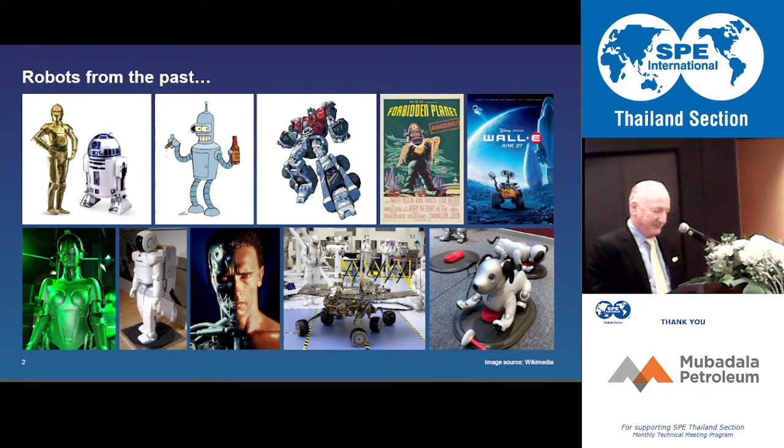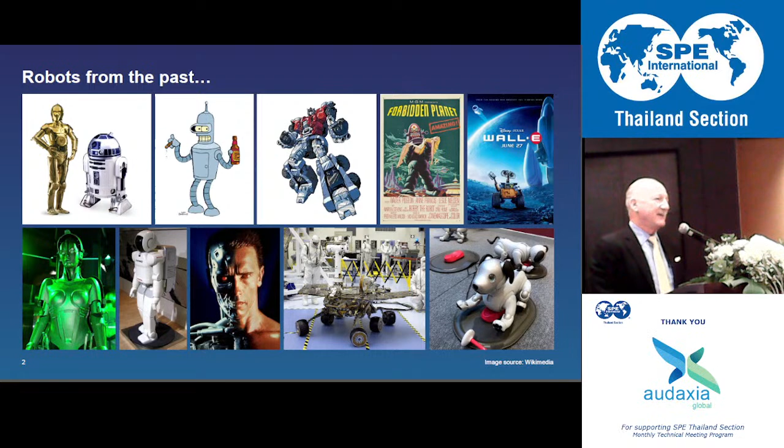So tonight's talk is on extreme robots, the benefits and the challenges. When we look at robots, what does it bring to our mind? Well, depending on when you were born, the word robot evokes a myriad of images. It could mean R2-D2 or a Dalek from Doctor Who, a cute robot from Star Wars, or a cyborg from the last horror film that you watched. But in today's offshore world, the robots that we use come in all different shapes and sizes.

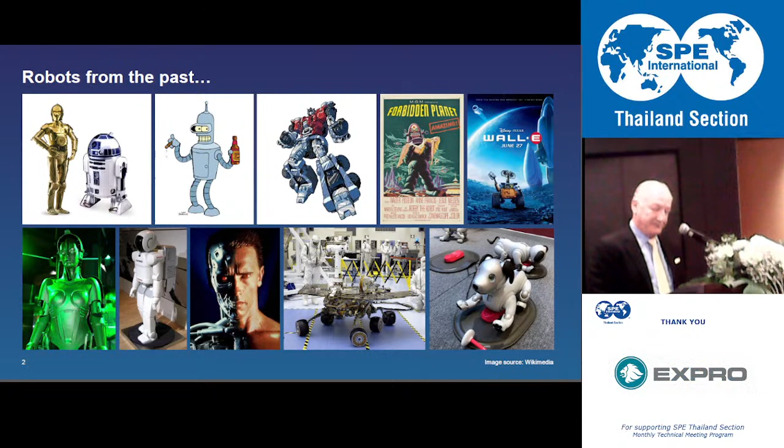What's driving the development of the use of offshore robots? Well, there's a whole lot of reasons, really. When I started to do this, it was before the invasion of Ukraine, so the price of oil was rather low, but it isn't anymore. However, when it was rather low, there was a need to reduce costs. And personnel are one of the largest costs that a company can have, because it's not just the salaries, it's the uniforms, the insurance, the leave, and everything else that's required.

Over the years, the people that have been in the industry for years are now retiring, and they're getting out of the industry. And a lot of young people don't want to join the industry, and they don't want to go offshore.

Renewables are coming on stream, and renewables are becoming very cheap. So the oil and gas industry has to reduce its costs in order to be able to compete with the renewables.

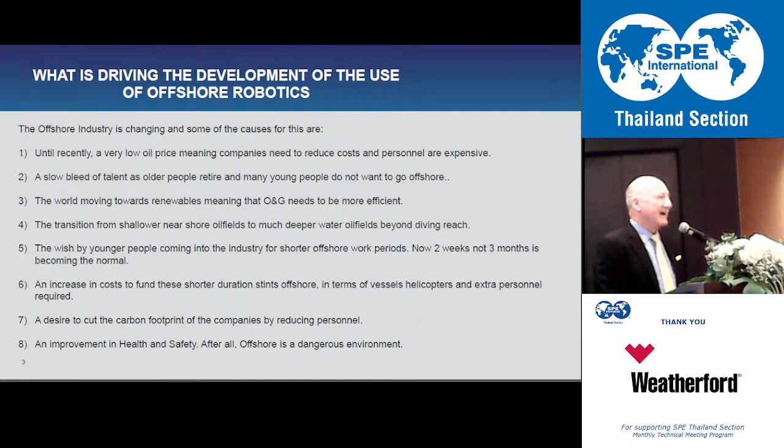In Thailand, Malaysia, Burma, Indonesia, and many other places in the world, the shallow water oil fields are drying up. They're coming to the end of their life, and people are moving to deeper water. So the use of divers is not possible anymore because the waters are far too deep. So robotics of one sort or another are needed to cope.

The young people that are coming into the offshore industry are no longer happy with going offshore for 3 to 6 months, as some of the older ones of us did. They'd like to go offshore for 2 weeks at a time. Well, that means you need more people. It needs more helicopters, more boats, more fuel. It's a much bigger cost.

We need to cut our carbon footprint. So in order to do that, we need to reduce those helicopters and vessels and the change-out costs. And then, of course, the offshore industry has always been a dangerous place to be. So for health and safety, the move towards robots is an obvious one.

Where do we use these robots? Well, really, we use them everywhere. They're in the air, they're on the platform main deck, on the drill floor, in the splash zone, and they're also used subsea. There's always somewhere where you can use it.

We're probably all familiar with drones. Some of us are lucky enough to have them as toys to take pictures with. But they're also known as unmanned aerial vehicles, or UAV. And they come in the 2 types you can see on the screen: minicopters and fixed-wing drones. We might today be familiar with the words Predator and Reaper and the images that these bring to mind, especially when we look at the photos and videos of the invasion of Ukraine. In the offshore industry, drones have an important role to play.

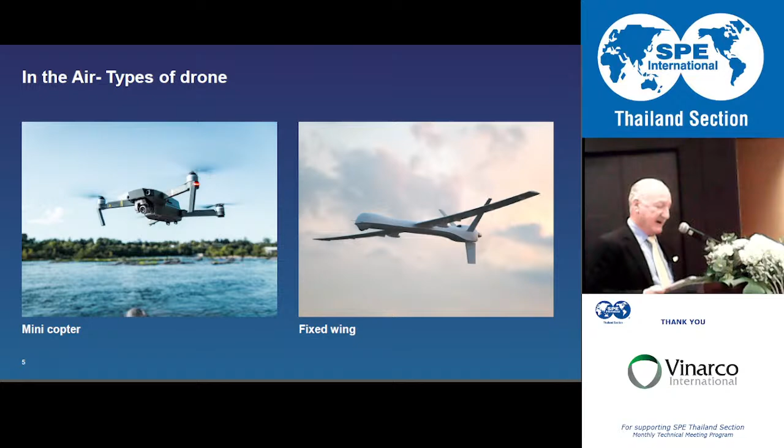Drones that can stay flying for hours and carry a multitude of different tools, cameras, and sensors are what are needed. And the tasks that these can perform are as diverse as pipeline surveys, gas and oil leak detection, flare stack inspection, corrosion inspection, and photogrammetry of structures.

We heard about 2 months ago at this SPE Thailand meeting about how detection of gas leaks can be measured from space.

With drones, we can use optical gas imaging, or OGI, to detect, visualize, and pinpoint gases such as methane, ethane, propane, butane, and benzene. And after we found these, you can perform TDLAS, or Tunable Diode Laser Absorption Spectroscopy, on it—TDLAS is a lot easier to say. This can be performed to identify and quantify the gas concentration. And this ability to monitor leaks, inspect for corrosion, and measure damage robotically is invaluable for saving time and money rather than performing these same tasks by traditional means.

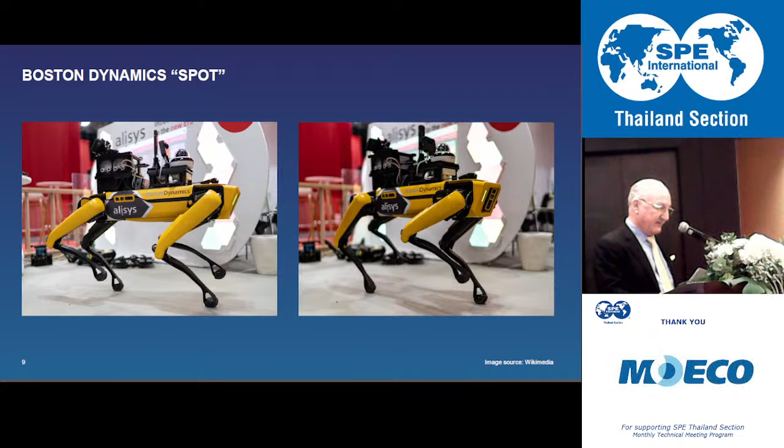Platform robots can perform the routine operations of measuring and monitoring corrosion, and sampling the air for leaks. Some can also perform even more useful tasks. Let's see what's available today.

One type of robot that you've probably seen on YouTube is called Spot, a robot dog developed by Boston Dynamics. It's now been refined so that it can recharge itself from its kennel, and it can carry instruments like lasers for measuring, cameras of different types such as low light, infrared, 3D, gas sensors, ultrasonic thickness measuring probes for corrosion mapping, thermal sensors, gauge reading abilities, and even a simple manipulator.

Spot can climb stairs and right itself if it falls over. It's become an asset to platform life. Having so many compatible tools that it can be equipped with makes it more useful, so much so that it can reduce the number of human personnel needed offshore. And that means a reduction in CO2 and less environmental damage.

This type of robot is especially practical on unmanned platforms, where the use of the robot greatly adds to the fixed camera systems that are already installed.

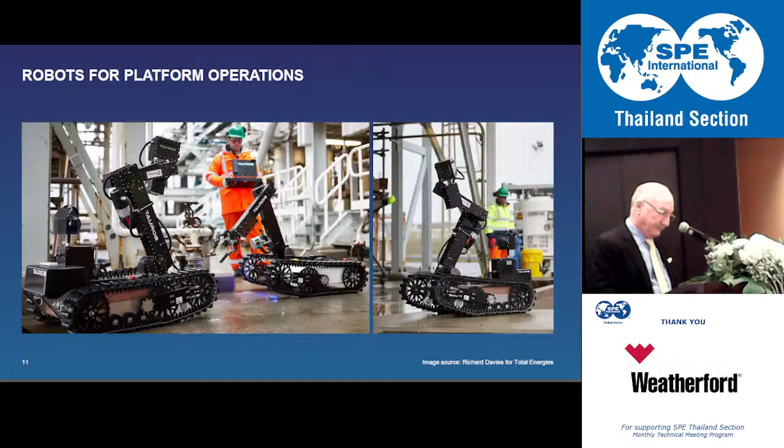Spot, though neat, is not built for strength. Tracked robots and wheeled robots are also being developed. These can carry much larger manipulators, meaning that valves can be opened or closed, and other such tasks can be performed. Another very useful application for these robots is the ability to enter places where the air is polluted.

This could come from an H2S release, or into rooms where fire suppression systems have been activated and the air is unbreathable.

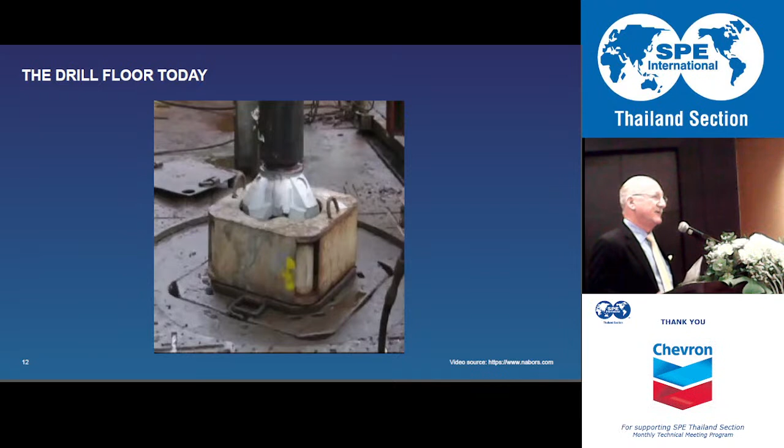For those of you that haven't been offshore, this next video shows the drill floor, of what happens today on an oil rig offshore.

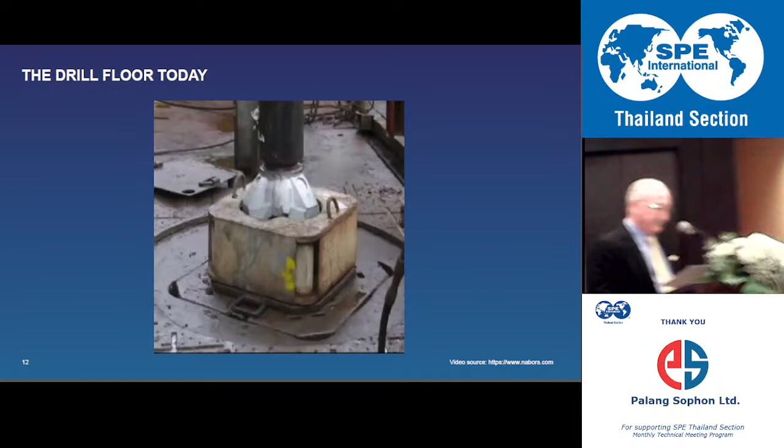So when we refer to extreme robotics, this is where we find extreme robots. It's on the drill floor. The drill floor is the most dangerous place on a platform.

It's where the drill pipe is screwed together in long lengths to be attached to the drill tube that's already in the oil well. This is where the drilling mud spills onto the deck of the drilling platform when we break the joints of drill pipe.

Because drilling is carried out to thousands of feet below the drill floor and the surface of the earth, when it's time to change the drill bit, the speed of joining or removing the drill pipe needs to be carried out as fast as possible.

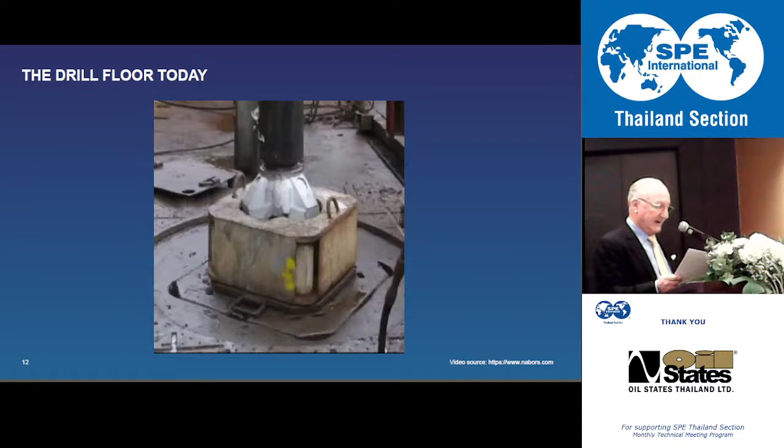Due to the mud making the deck slippery, the weight of the drill pipe, speed of the operation, and the size of the equipment being used, together with the always present danger of a blowout or gas discharge, the drill floor is where most accidents happen.

On top of these dangers lie natural hazards, such as the cold when drilling in the Arctic, or the heat when drilling in the tropics. Drilling takes place 24 hours a day in the dark as well as the sun, when personnel are just awake or feeling tired, which is when accidents happen.

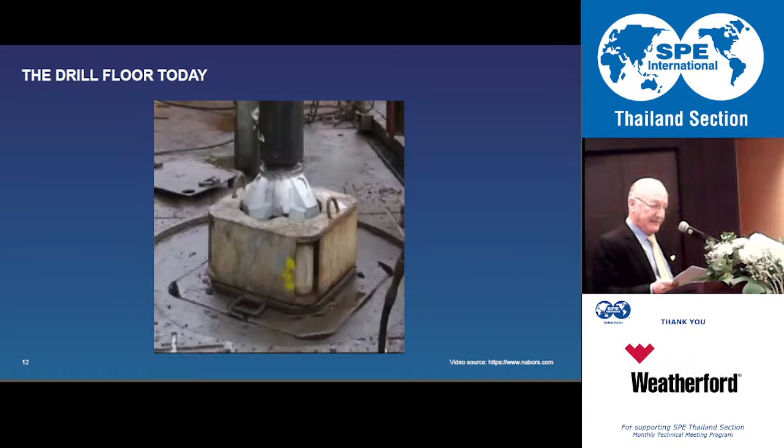If the drilling could be automated by using robots, this would be a great health and safety step forward. After accidents like the Deepwater Horizon in the Gulf of Mexico, the loss of life on the drill floor means drilling methods need to change.

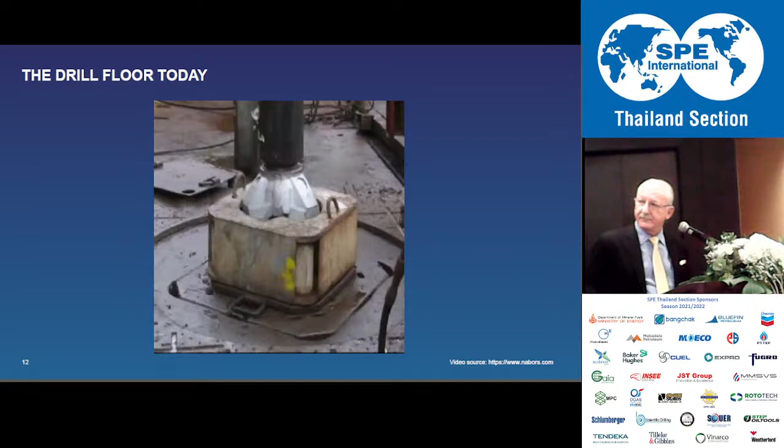The use of these new roughneck robots is expected to save 40 drilling days per year. This can equate to a saving of up to $12 million US.

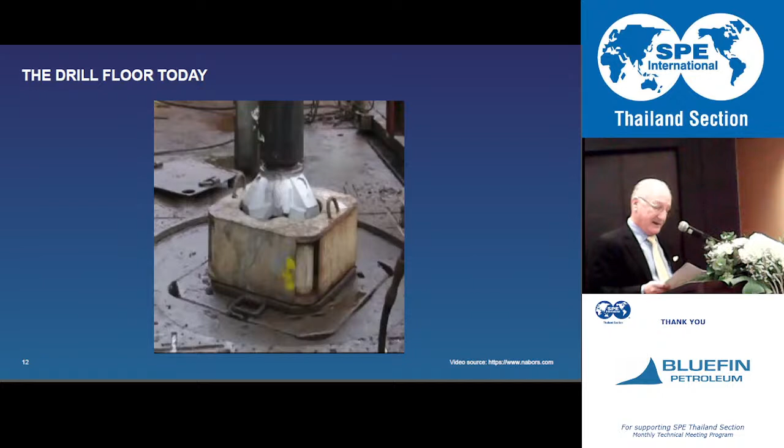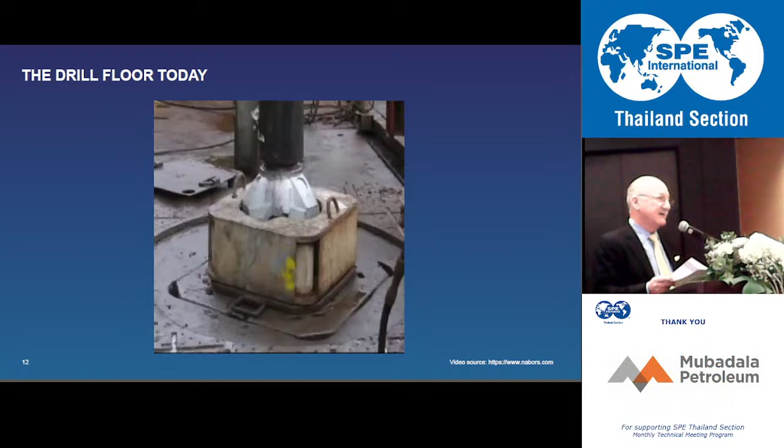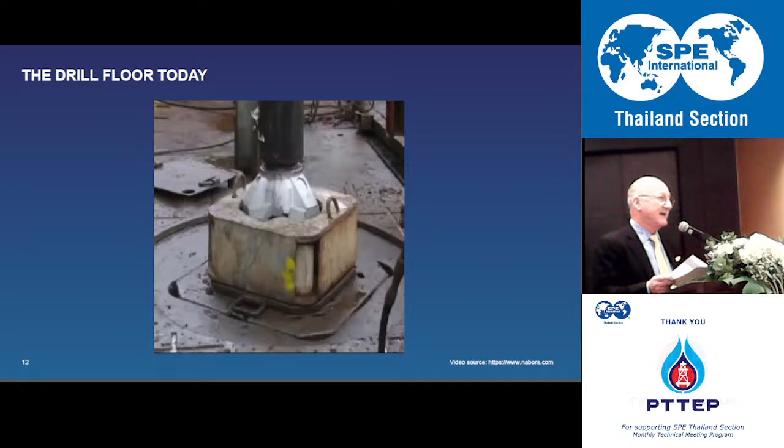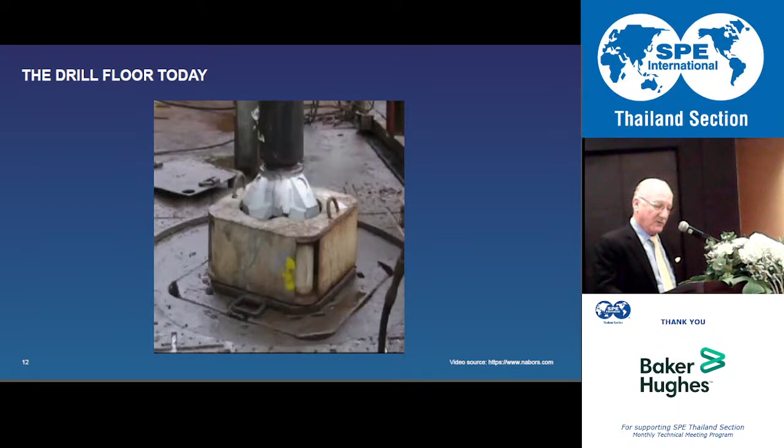Robotic operations mean that drilling crews can be reduced. This saves personnel costs, insurance costs, transport costs, and manning costs. And from a safety aspect, with a robotic drill floor, no personnel need to be in the red zone. Reduced costs in terms of time, a smaller CO2 footprint, and safety improvements are all benefits of adopting robotic solutions.

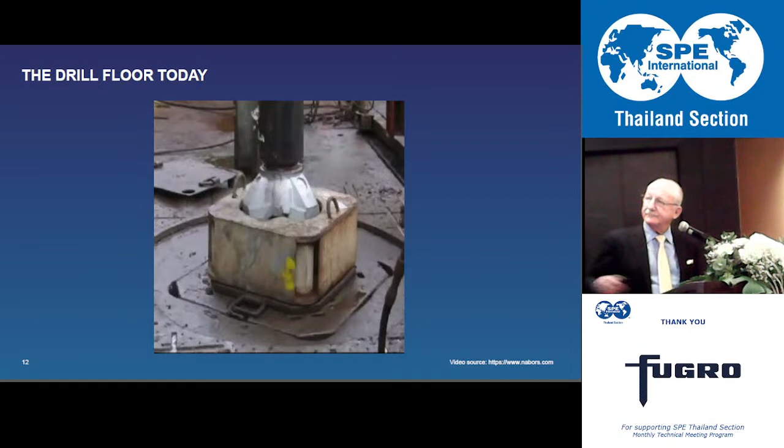This is the reality today of a fully robotized drilling floor. You can see in here the two drillers are in their cabin there. That's isolated from the air on the drill floor, so if there was a blowout or a gas discharge, they're safe. There's absolutely nobody near where you're taking the drill string out, joining it, or torquing it up. It's a much, much safer environment.

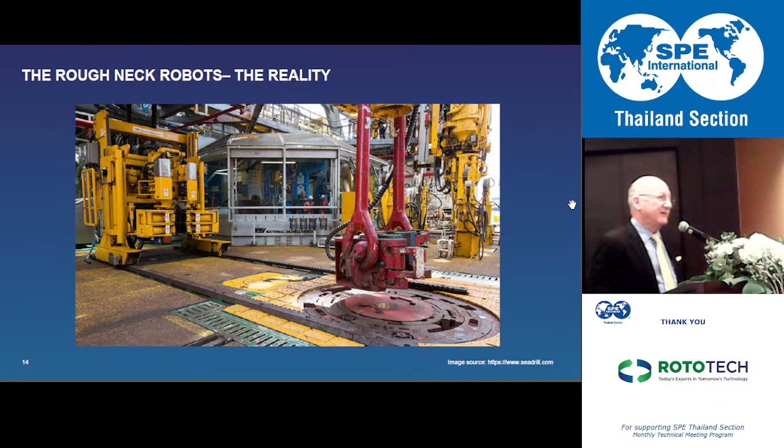Subsea robots. There are many different tasks to be performed subsea, and some have traditionally been carried out by divers. But now that the oil and gas industry is moving to deeper waters, divers basically can't go deeper than about 1,000 feet, although the record is about 2,002 feet. ROVs, or robots, are a much better way of doing things. When used subsea, these are referred to mostly as remotely operated vehicles, or ROVs. But today, they're now called autonomous underwater vehicles, or AUVs.

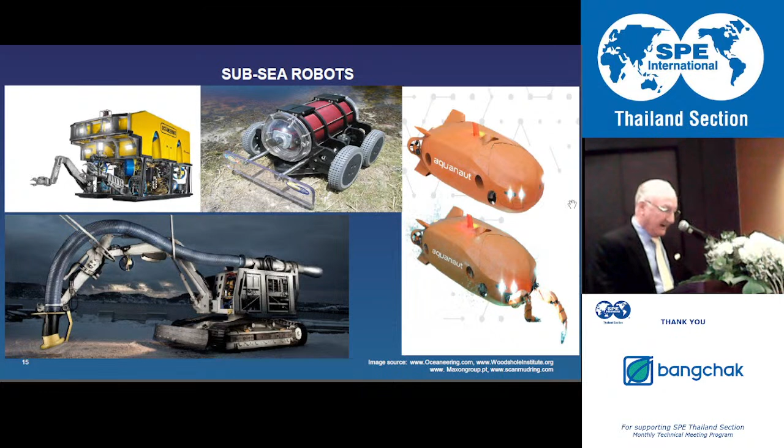A traditional ROV is operated via a wire, or tether, which connects the ROV to its control console and power supply. When used in deep water or in high currents, the tether causes drag on the vehicle. The longer the tether, the more drag this puts on the robot, which in turn reduces its range. In deeper water, to use short tethers, the ROV operates from a garage with a tether management system, where the tether is coiled up and released as needed. This makes the system more complicated, and simplicity is the key to good robotics.

To overcome this problem, and also to perform tasks such as pipeline surveys, a new type of robot was conceived called the AUV. We're probably most familiar with AUVs through the search for the lost aeroplane MH370, which was conducted mainly with the use of these robots. An AUV is pre-programmed with the task to be performed. It operates on batteries, which means the tether is not needed, and it does not need a surface vessel to run along behind it providing power and instructions.

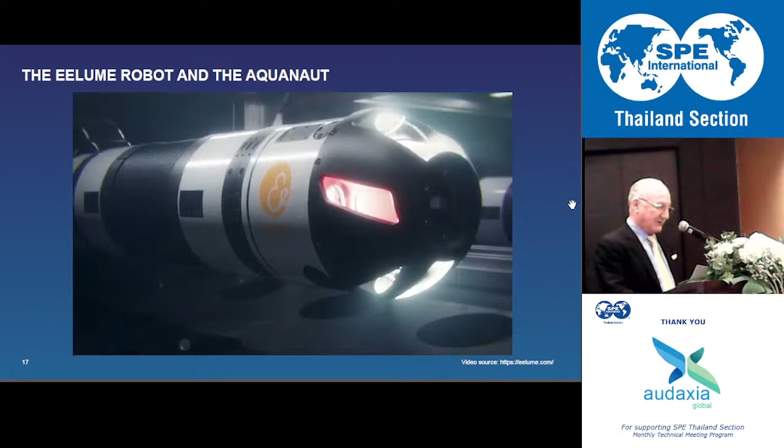The Eelume lives in an underwater garage, where it recharges and uploads the data it's acquired on its last mission. By working in this way, it minimizes the need for large support vessels, cutting fuel and personnel costs. It minimizes the time taken for launch and recovery to get to the job, and increases working time on the seafloor. They can inspect wellheads and pipelines, detect leaks, and open and close valves.

Another new development is the AUV that can turn into an ROV in a few minutes, and one such example is called the Aquanaut. This was developed by scientists and engineers who all worked for NASA. This gives it the ability to travel at speeds of up to 6 knots, meaning fast transit times and a high-speed survey ability. It has a long-endurance battery power pack and is equipped with very high-tech manipulators, making it dexterous for delicate tasks.

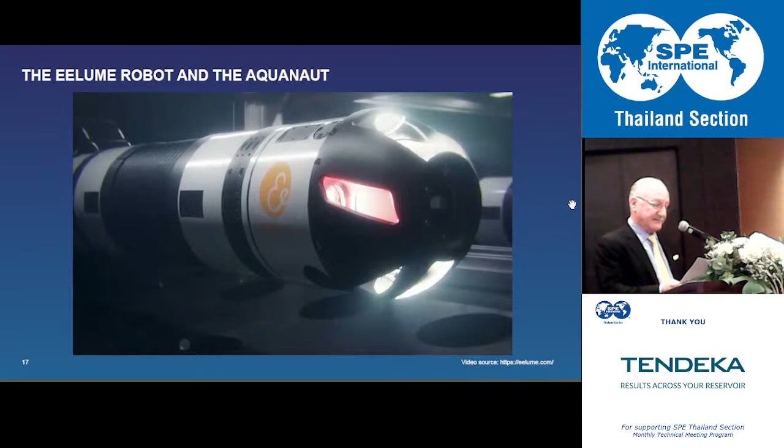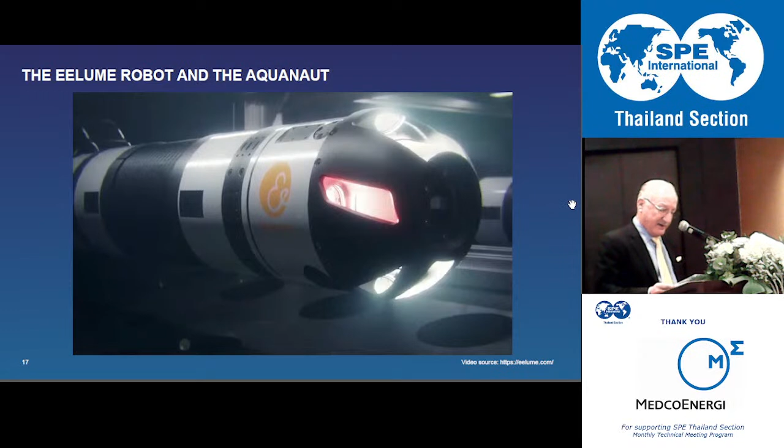Neither of these robots, sophisticated though they are, can carry out all the repairs that may be necessary subsea.

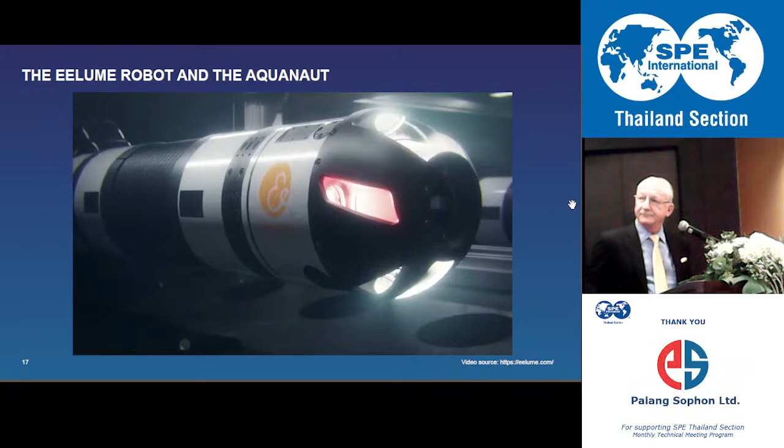The splash zone. This is the area on an offshore platform that needs the most inspection and repair work. This is because it's the area where salt water and oxygen mix on the steel of a structure, causing the most corrosion. It's also the area where flotsam and jetsam impact the structure, and occasionally vessels do as well. It's the area where the coating comes off the quickest, which obviously means the surface of the steel is exposed. Therefore, corrosion and rusting happen. It is the most challenging area to work in.

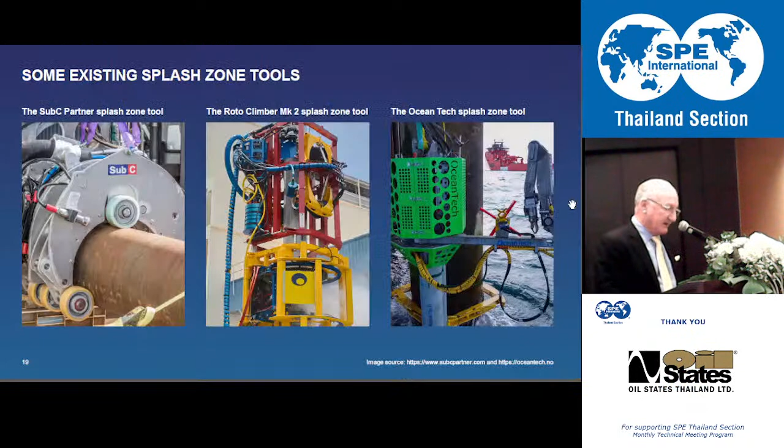Here is a look at some of the tools that are currently available for work in the splash zone.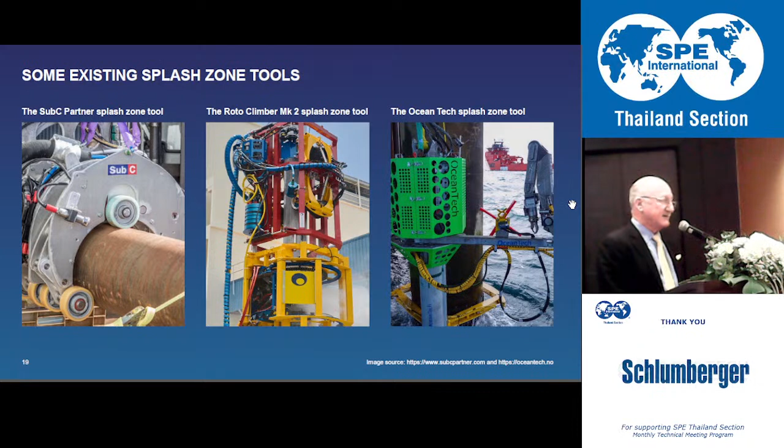Some of the problems with inspection and repair in this area are the size of the waves. Off Norway, waves of 25 meters have been recorded. We're on the 7th floor of this building - 25 meters equates to a building of 8 stories high. In Thailand, 2 meters is common.

The rise and fall of the tide is another problem. In some places, this is as much as 15 meters. Here, it's generally about 2. And then there is the current. In Thailand, in general, it's about half a knot. But in other parts of the world, it can be 4 to 5 knots.

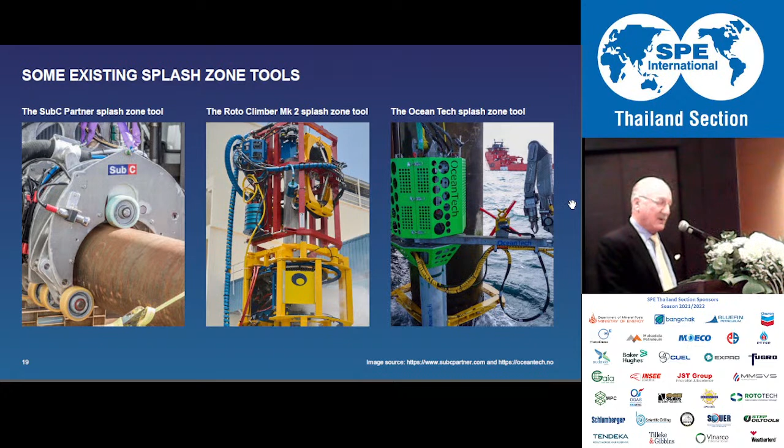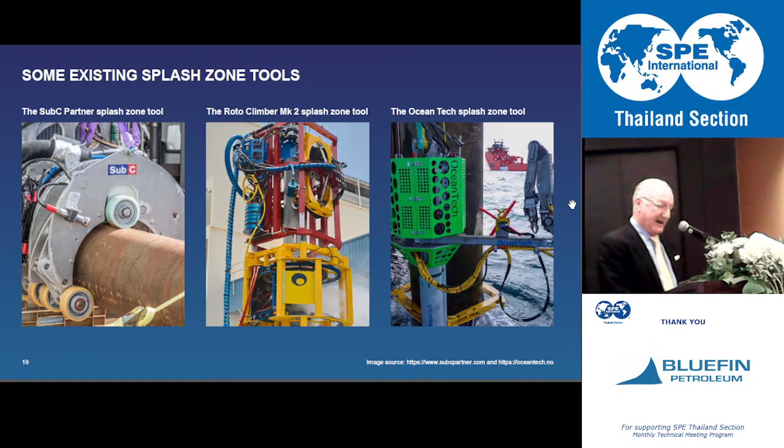All of this, when mixed with the locations of the boat landings, the conductors, and the risers on the structure, and the hazards of fishing line and rope entanglement, all these make work with divers or ROVs incredibly risky and dangerous. To perform actual work in this area is almost impossible, and yet this is where the work is most needed. In this video, you see examples of existing robot technology.

As well as everything we've just mentioned, there is the location of the area that needs repair and inspection, which is at sea level. This can be 30 meters below the main platform deck. To get here traditionally is by rope access. To be able to work here, the robot needs to be able to cling on to the structure or the pipe that needs inspecting. Here we can see the swells, and this is a calm day off Denmark.

It needs to be able to cling on hard enough not to be knocked off by a wave or washed off by the current. It would seem easy to surmount this problem for a robot that has arms wrapped around the pipe. However, the risers are attached to the structure by clamps.

And in order to be able to climb down the pipe, the robot needs to be able to move past this clamp. This involves a method to hold on with one arm and with the other arm reach around the clamp to hold on the other side before you let go with your first arm.

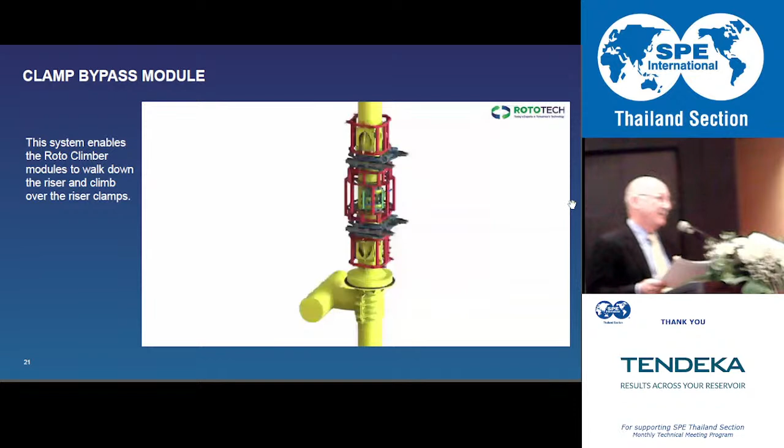This can all be done, but then there is a restriction on the weight of the robot that can hang on to a pipe to consider. And the area of operation that we're working in is called Zone 2, which means that the robot needs to be certified to work in an area where gas could be present that may be ignited.

And in addition to taking video and photos and corrosion readings, maybe laser scanning or weld crack detection is needed. If problems are found, then some form of repair needs to be carried out. And this is where current robotics come up short. There are almost no robots today that can repair risers, conductors, or members. The most common repairs undertaken at present are the installation of clamps.

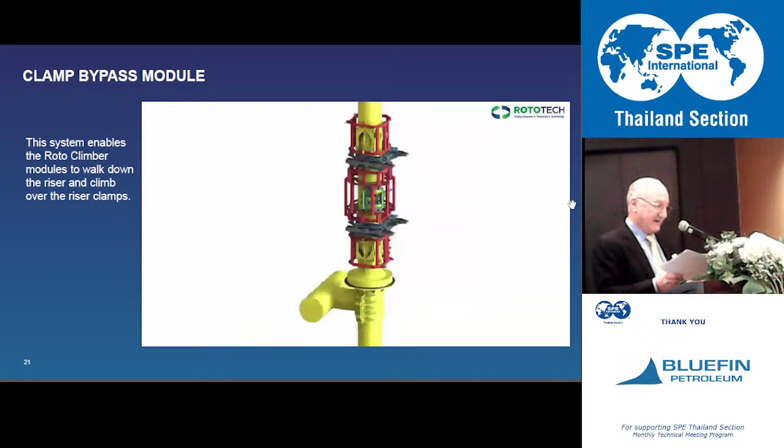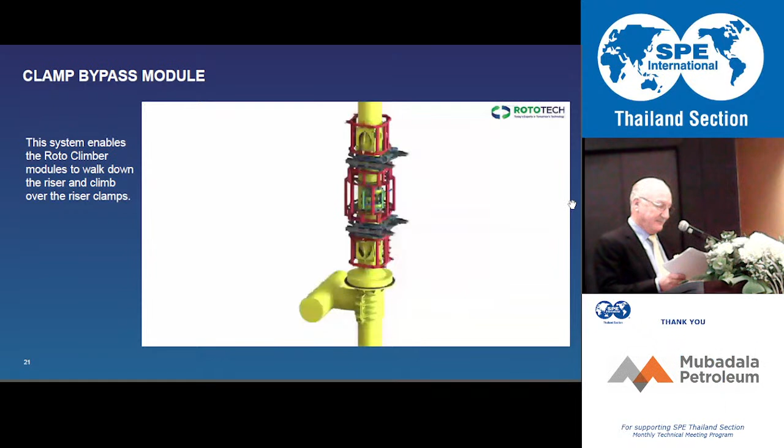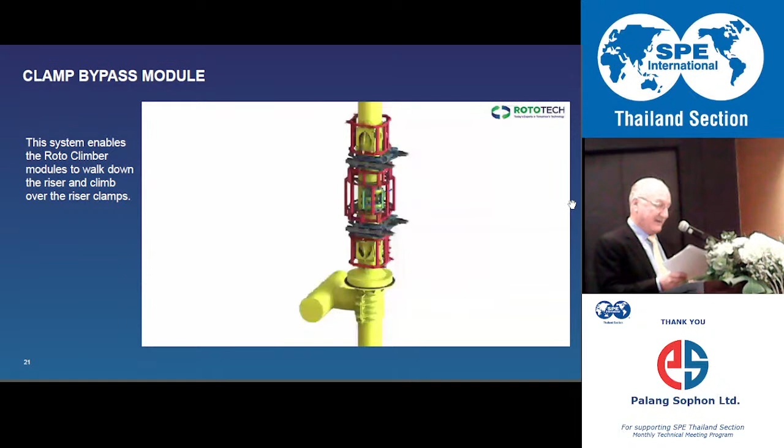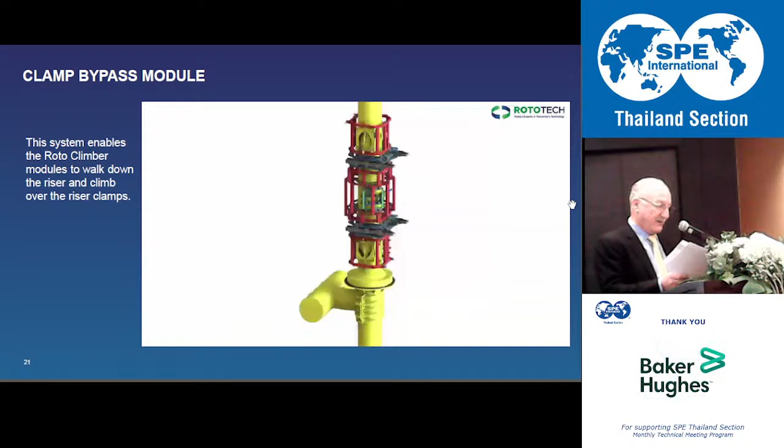This is normally performed on a horizontal pipeline. A rough costing for an ROV installed clamp on a pipeline would be in the range of $7 to $10 million, depending on the pipeline size, pressure, the length, and the depth below water of the repair that's needed. Today, it's not possible to put a clamp on a vertical pipe, such as a riser, robotically.

Another technique in common use is wrapping the area with a suitable tape that may protect from further corrosion, or it might be used to strengthen the pipe to reinstate it to its original working pressure. Before the tape can be applied, the area needs to be thoroughly cleaned so that the tape will adhere. Should there be holes in the pipe, then these need to be covered before the tape is applied. And finally, it may be necessary to apply many layers of tape for pressure containment.

12 wraps are not unusual. 12 wraps give 24 layers because each wrap is overlapped by 50%. If we take an example of a 36-inch pipe and we want to wrap 2 meters of pipe, the robot needs to be able to carry 1,750 meters of tape. That's a mile of tape to perform a 2-meter repair. This means that the robot needs to hold this much tape, be able to wrap it, and be able to join the tape rolls together.

This is the sort of extreme robotics that are needed offshore. Purely inspection-related abilities are no longer enough. As oil and gas facilities age, they need repair. This is driving the demand for ever better and more sophisticated robots.

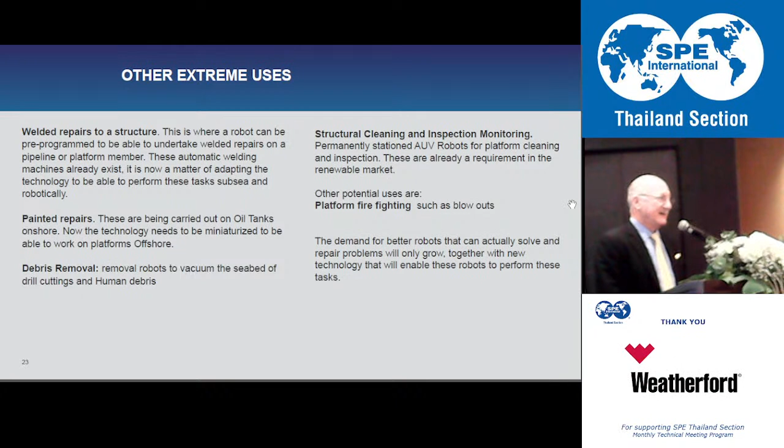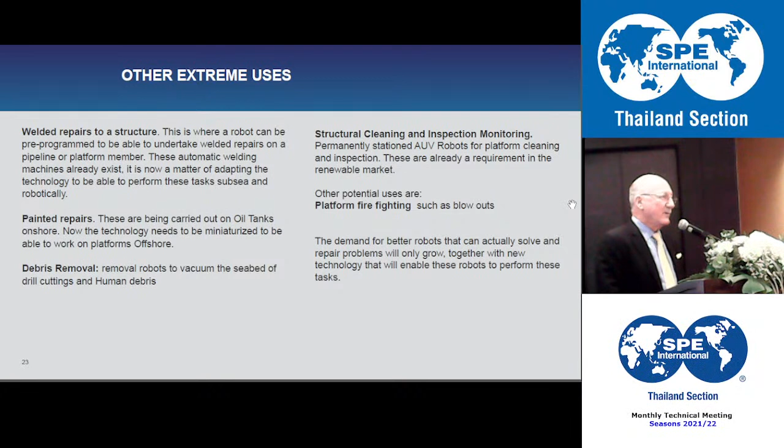Painted repairs - it's far easier to paint something than it is to wrap it. And paints are already regarded as being able to give you a 15-year life. Why can't we paint these areas? We're doing it on oil tanks, so now we need to miniaturize the technology and develop new paints that can be applied in the areas we want them. Lots of stuff gets thrown overboard from a platform in its life, and this needs to be able to be removed.

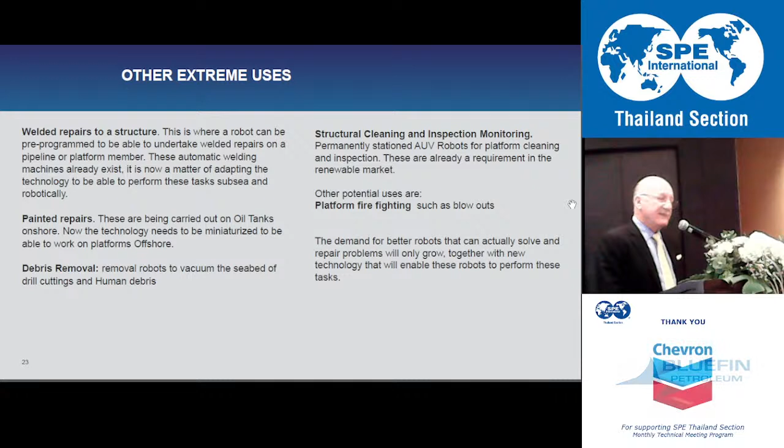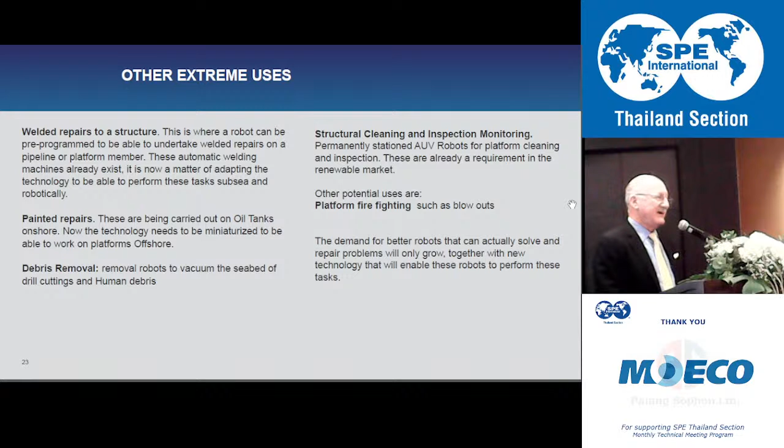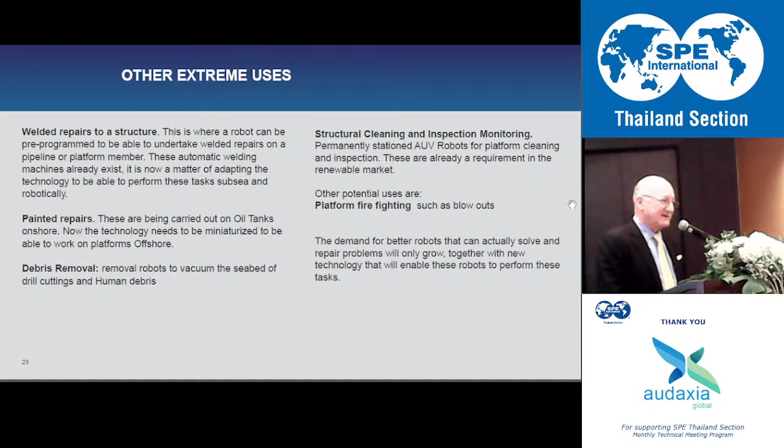In the renewable industry, it's now a requirement that structures are inspected every year for the first three years. To do that, they have to be cleaned and inspected. Today that's done with a vessel and either an ROV or divers, and it takes a lot of time. That vessel costs a lot of money. Why can't we have something like the vacuum cleaner we see in the shops now, that's remote controlled and goes back to its charging station? We could have an ROV or AUV like that that goes out and does it.

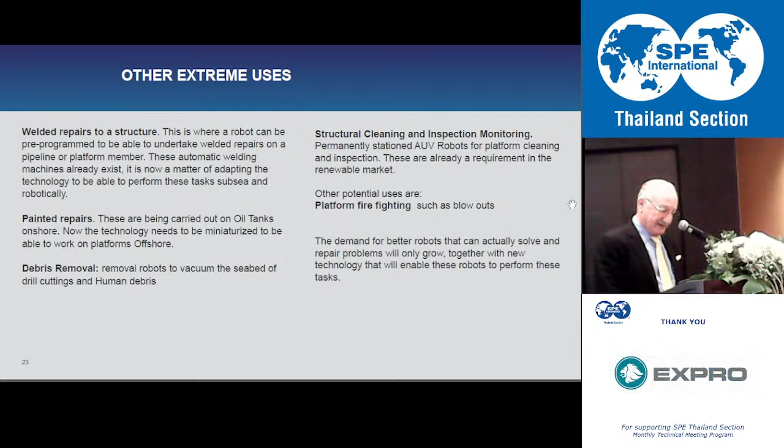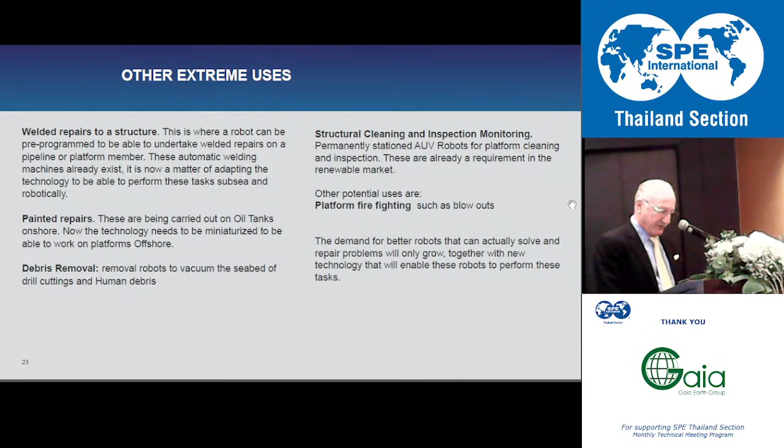Firefighting is another area. And the demand for better robots that can actually solve and repair problems will only grow, together with the technology that will enable these robots to perform these tasks.

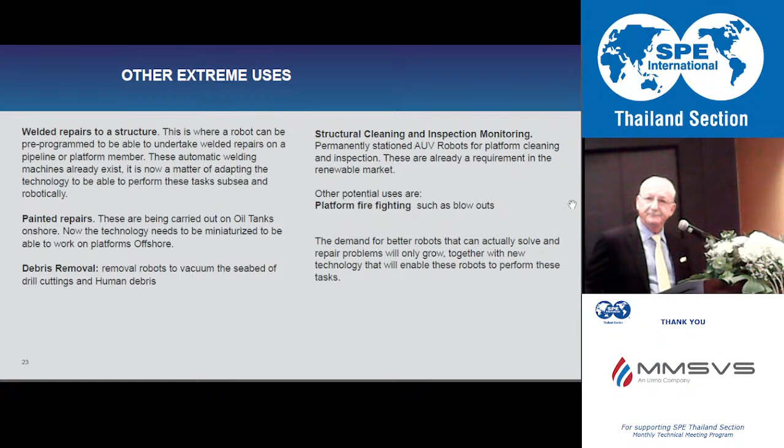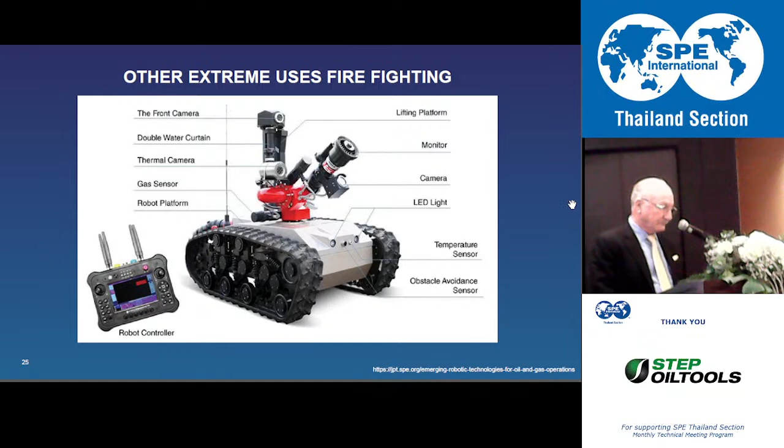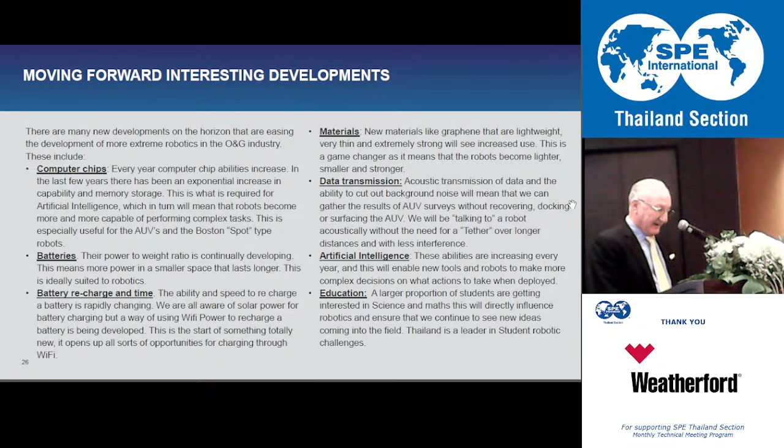As we move forward, there are many new developments on the horizon that are going to make more extreme robotics easier. The ability of computer chips to store more information is big, because with that comes the ability for the artificial intelligence of robots to increase.

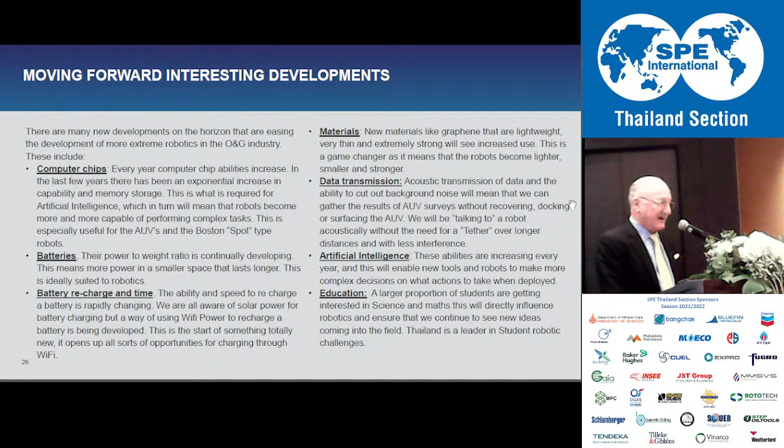In order for AUVs to travel further distances, you need better batteries, and every day these are being improved. They're getting smaller and lighter, which is ideal for robotics. Today we recharge batteries with solar power or by plugging them into the mains, but there's a Korean company that has now developed a way to recharge your telephone through a Wi-Fi signal. It won't be long now before that's a new ability.

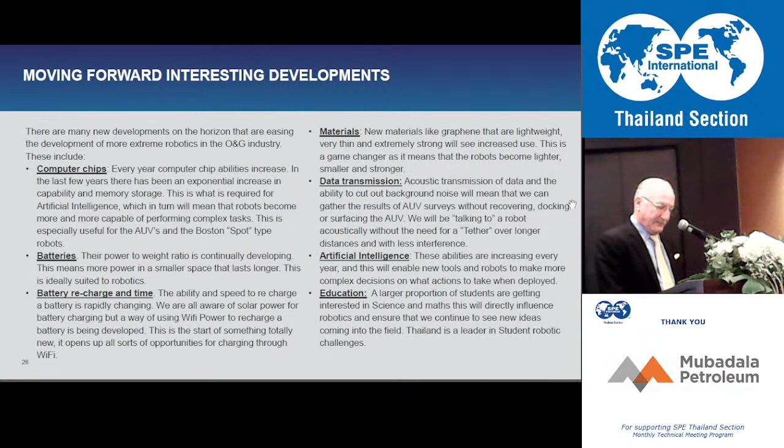Then we've got materials like graphene, which has just been invented. It's lightweight, very thin, and extremely strong. This is a game changer because it means robots can be smaller, lighter, and stronger.

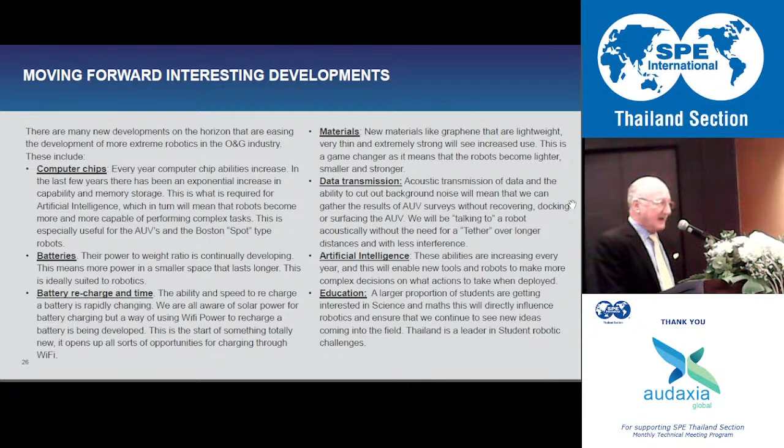Acoustic data transmission is something that today is quite difficult because the sea is very, very noisy. Apart from ships and boats, you've got irritating little things like prawns that make a terrible noise underwater, and you have to cut out all that background noise in order to hear the signal you're trying to hear. But this is becoming more and more possible, and that means you won't need to dock your AUV in its garage to upload or download data. You'll be able to talk to it while it's swimming along in the water.

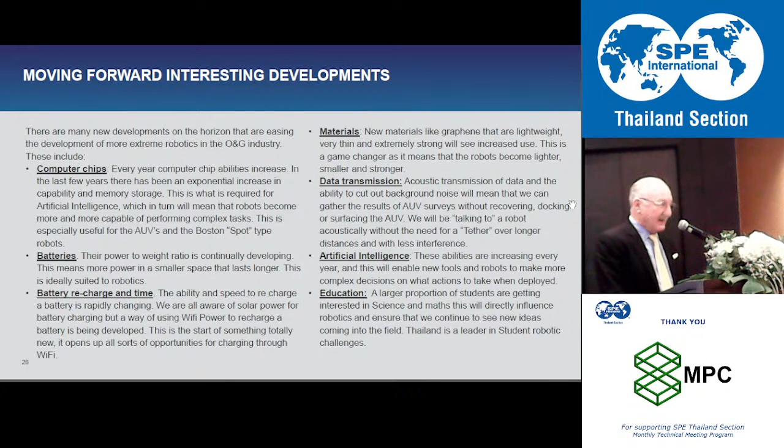Artificial intelligence is increasing every year, and this will enable new robots to make more complex decisions on what actions to take when they come to a problem. And of course, education.

And that's what's so lovely tonight, is to see that there are so many of you here from the universities that have come to hear a little bit about robotics. Thailand has always done very well in robotic challenges.

As a conclusion, when we look at what we're capable of doing as humans, apart from bombing each other to bits, look at NASA and its Mars rover, with the helicopter Ingenuity flying on the surface of Mars, where signals take hours to get there and back. Look at the new James Webb telescope and the way that was built in so many pieces, and it's been unfolded and it's back in position and it's working. That's an incredible thing to be able to do.

The feats that we can achieve are truly amazing. It makes me sure there's a great deal more that can be done here on Earth, even in the challenging realm of the offshore marine environment, which after all covers so much of our planet. Thank you.